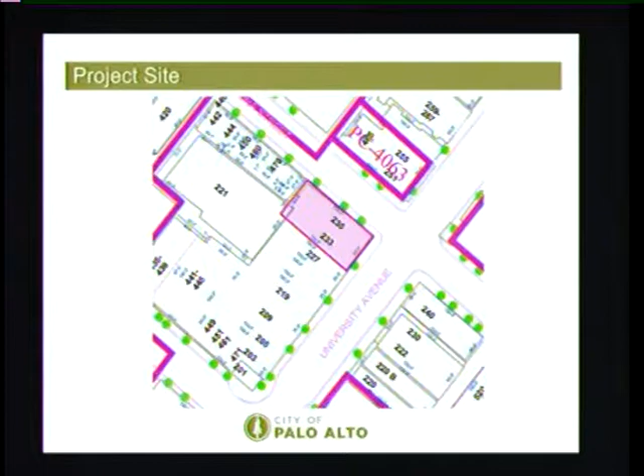Good morning, board members. Claire Hodgkins, project planner. The project before you today, as you noted, is 233 University Avenue, located on the corner of University and Ramona. The project actually includes 2 addresses, 233 and 235 University. As you noted, it's located within the CDC GFP zone district, which is commercial downtown community with a ground floor and pedestrian combining district. Existing uses of the site include the Mills Florist Shop, the tap room, and the hookah lounge.

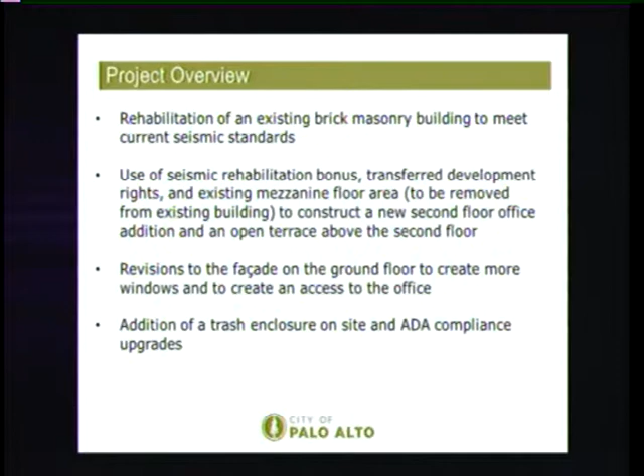Just a brief overview of the project's different components: rehabilitation of an existing brick masonry building to meet current seismic standards, using a seismic rehabilitation bonus and transferred development rights. Existing mezzanine floor area, which would be removed from the existing building, would be used to construct a new second floor office addition and an open terrace above the second floor. It also includes addition of a trash enclosure on site, ADA compliance upgrades, and revisions to the facade on the ground floor to create more windows and an access to the office.

I just wanted to go through some of the key revisions made since the last hearing. The ARB had commented on the rear and interior sidewalls in particular, so they've revised the materials on the rear and side wall partially to use some stucco and some metal to break up that facade. They've also added a few non-operable windows that would be fire safe.

The ARB had also commented on the brick detailing, so they are going to be keeping the existing brick capitals that would be flanking the sides of the doors, as well as a brick trim to be added or retained on the top portion.

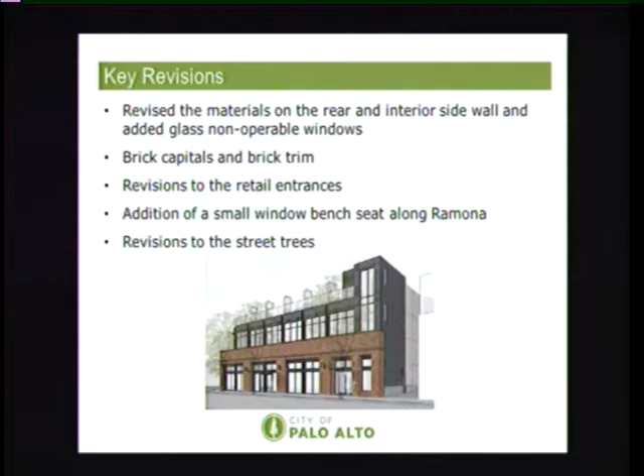There were some revisions to the retail entrances. The ARB had commented that they felt the entrances should have been located closer to the corner of University and Ramona. The retail entrance along Ramona was moved slightly closer to the corner, not quite as close as I think the ARB had commented on, but there were some grade separation issues that the architect has been trying to work around. So I just wanted to note that.

There are two designs proposed. The applicant is proposing sliding doors for the retail doors along Ramona, but they've provided an alternative that would include doors that open up, swinging doors, which is what staff would recommend for the site.

The ARB also recommended improvements to the pedestrian experience, including a small addition of a seated bench within a window along Ramona. We did look into adding a bench in the public right-of-way, but Transportation Division and Public Works Engineering had some resistance to that. They felt this was not the best location, as there were already a lot of things going on in the right-of-way, and it wasn't wide enough to be putting in benches within the public right-of-way.

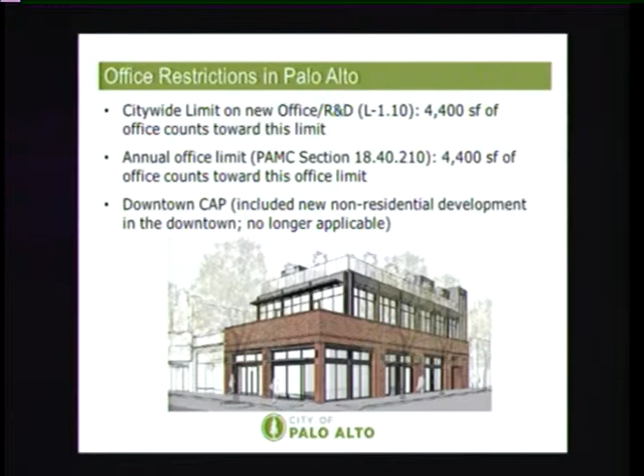There's also an annual office limit. I noted in my last staff report that there was somewhere around 20,000 square feet still available. Again, this project is adding 4,400 square feet, so it wouldn't exceed any of those requirements.

Staff recommends that the ARB consider the proposed project and provide comments, based on findings and subject to conditions of approval. And with that, I'll turn it back to you.

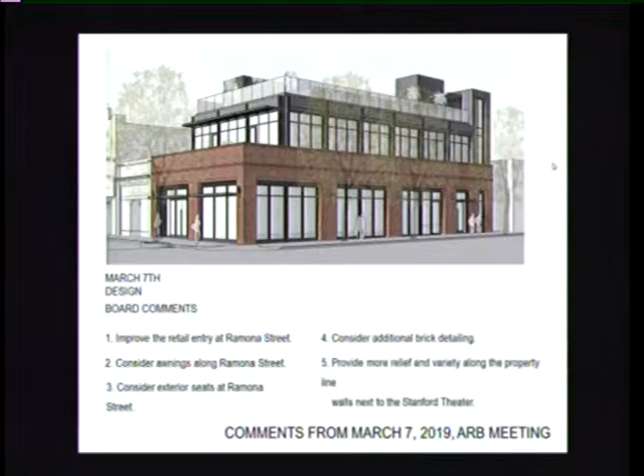I think staff already did a great job showing you the changes, but this is the revised Ramona Street facade, and you can see here the idea of two sliding doors. There is a grade issue—we're able to meet the grade on University and on Ramona in this bay, so you would walk right in from the Ramona sidewalk at the same level as the interior of the store. As it goes one way, the sidewalk climbs; as it goes the other way, it falls about 4 to 5 inches. So this is the natural place to put that opening.

So we're showing sliding doors, so they would both slide open, or an alternate. I rarely have an alternate for you, but an alternate would be in that same bay, do a pair of swinging doors. The swinging doors most likely need to swing out, so there's a bit of an impact to the plan that I'll show you a little bit later.

We would define those entries by canopies. So this canopy was already shown previously at the office entry, but taking board member Hirsch's comment about adding some more canopies on Ramona instead of doing it everywhere wholesale, we said let's just define the entry. So we provided one at the entry itself.

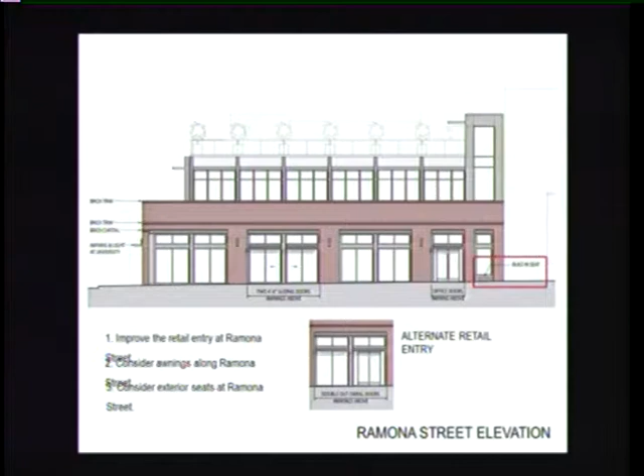Staff explained that Public Works and Transportation were not excited about a seat along Ramona in the right-of-way, so we've lowered the sill at the stair element where there's a deeper recess. I think it's about 16 or 18 inches deep, and now it's about 18 inches high, and there'd be a precast concrete slab there that would be seat height. So you could have a seat there by the office entry to wait for a coworker or what have you.

At University, we're also proposing—now you can't walk out here because there's this 5-inch grade separation, but we think it would be nice to be able to see into the store. So we're taking that sliding door concept, sort of like what we did at Hoya years ago. Those doors on the corner would slide open and stack over here. So the corner would be partially open, but there's a decorative metal rail to prevent people from walking in and out of that entrance. The entrance here remains.

We show the brick detailing at the top of these columns that is existing, and then there's the existing frieze that we're taking around the side of the building, and of course the existing cornice at the top of the brick wall.

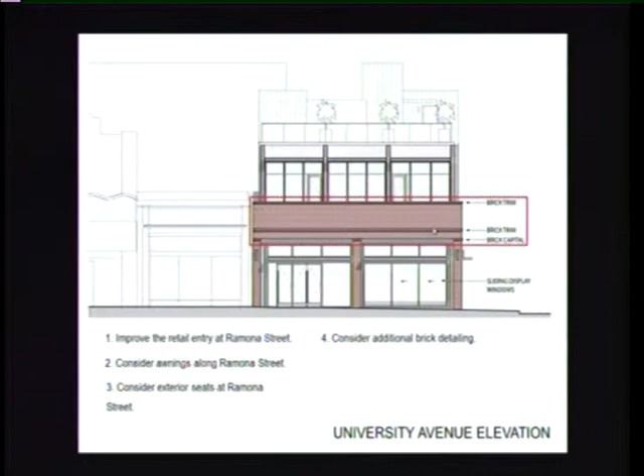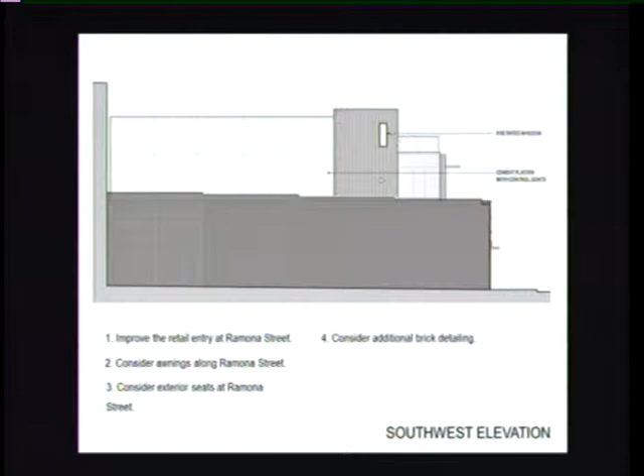And then we added fire rated windows. As staff explained, non-operable fire rated windows, but they do allow light into the stairwell, and they start to break up that facade a little bit. Not much of it's visible from the street.

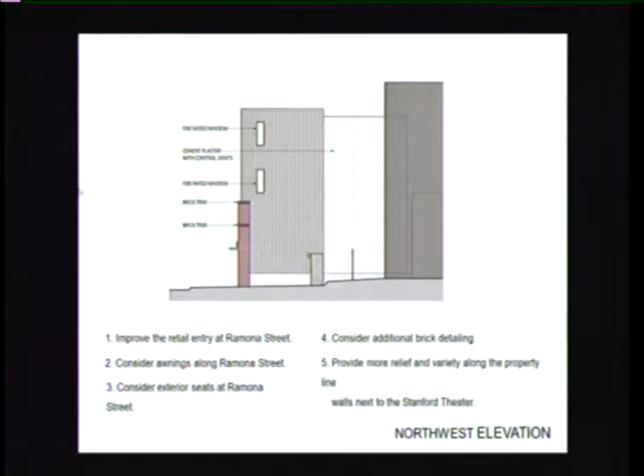And then a similar, this is the Stanford Theater here. Our building stops right here. We have the door that comes out into this exit, hopefully easement, and the metal panel again defining the stair, and then we have that sitting on a concrete base that wraps around to the sill at the Ramona facade. And then in this location we're able to get 2 windows in. Unlike the other location, you can only get 1 because of where the landings are and the building next door.

And that is the presentation. Oh no, I'm sorry, there's a few more slides.

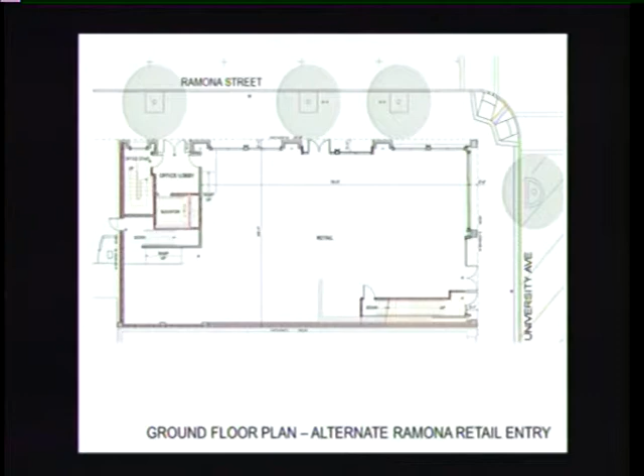So this is the ground floor with the sliding doors. In this area, if we do the swinging door, we need to set that in, so that would be an interruption, let's say, in the facade. But we could do swinging doors—can't swing over the property line, which is why we have to set it back. And then this just shows the window location here, over in that stair, and then you see the canopies below in that area. And then the window here and the window there, and no other change.

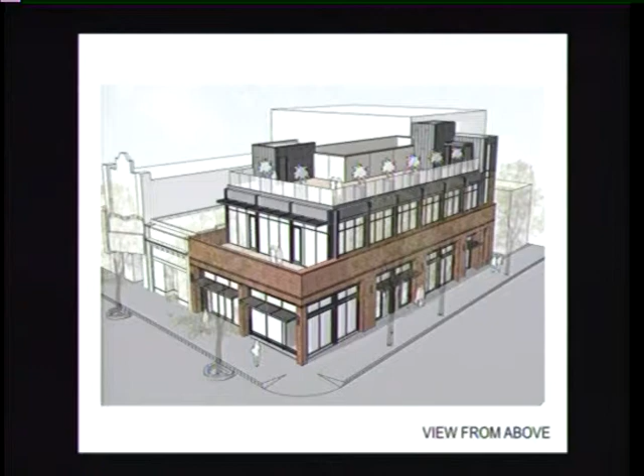Just an overall shot from there, the view that staff had, view from the street, so you see how this now breaks up.

And then with and without the tree—the camphor tree, we've been requested to keep the camphor tree. So you can see the building, and so you can see the tree.

That's my presentation. I look forward to any questions you might have, and hopefully we have the support of staff's recommendation. Thank you. Thank you.

Any questions of the applicant before we start discussing this amongst ourselves?

Is there a material board again? I think yes, it was there last time, right?

Oh, wow. Peter, any questions?

I'd like to ask, what's your preference? The closer, sliding to the door. The sliding doors. Yeah, okay.

Peter, any questions? Yes, Architect Hayes: what is the offset on the aluminum panel, the metal panels defining the stairwells on the inside sidewalls of the building, between the plaster and the aluminum or metal?

2 inches, it sounds like. 2 inches? You're talking about between the stucco, yes. Board Member Balte? Yeah, 2 inches, right there, between those two materials. There's 2 inches offset. This is not our building here, but right there, yeah, between those two materials. Correct. Thank you.

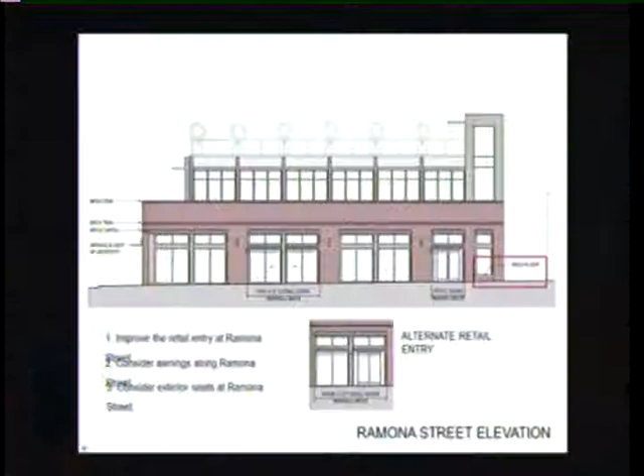That one doesn't have a triumphal procession of Greek gods? Right, that one. I was going to say, I didn't really see a frieze like the Parthenon or such. Sorry.

Good questions. You understand I'm working from art history rather than being a trained architect. All right.

Any other questions? Okay, I think we're good. I'm sure we'll have more.

Thank you. So before we start discussing, I went back, and since we were all reading the minutes of your last meeting, we discussed the dimensions of the front window bays. Ozma had a concern about the relationship of the glossy aluminum panel and the brick. Peter had a concern about how the brick would actually be used. Room for street trees, the wall facing the Stanford Theater, the wall facing the alley, canopies on both frontages, whether the roof elevations were a bit random, the retail entry on Ramona, the detailing of the brick, the seating, and the need to keep the windows open, which Alex mentioned.

Okay, staff, just to be clear, this building is applying for a seismic bonus, so this has to be a rehabilitation rather than a demolition, and the walls to be retained as shown on sheet A10 are the interior wall facing the theater and the wall facing University, but not the wall facing Ramona. That is free, do whatever they want with that wall.